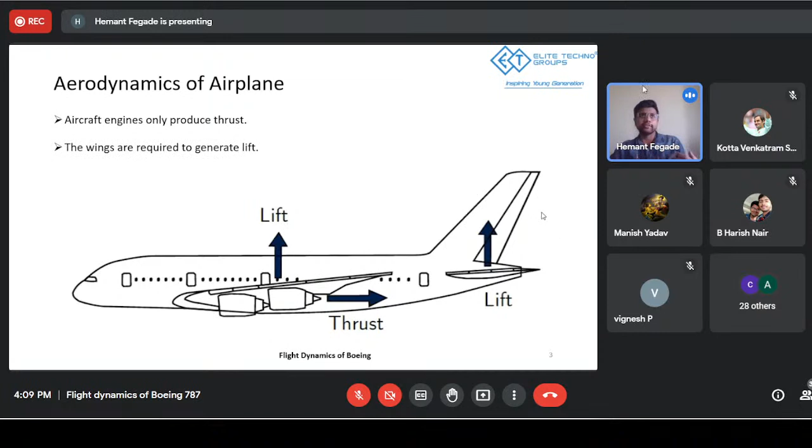When you talk about aerodynamics of an airplane, the first thing that comes into play is that an aircraft has two kinds of motions. In order to fly, it needs to have a certain set of motions in order to get that momentum going, and then it has the biggest influencing parts, like in aircrafts there are the wings, which are the biggest influencing parts that generate lift in the aircraft.

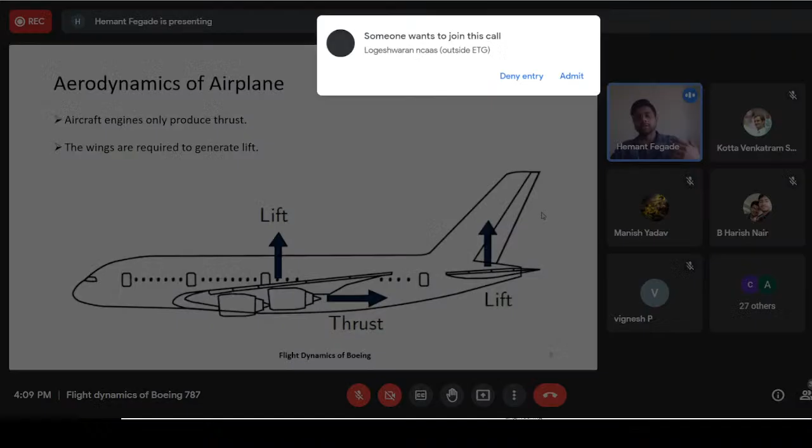Essentially, when you are moving an aircraft, the aircraft engines will provide the thrust that it requires to move forward and achieve a certain speed, and then the wings are adjusted in order to generate the kind of lift in this scenario. Now why, when we talk about this aircraft lift...

There is a phenomenon in those wings - there are small sections that are used, called airfoils. So if you take an aircraft and slice it, and see the side view of it, you will be able to see a shape that is constant throughout the aircraft, but it actually has different sizes. Towards the end of the aircraft the size is smaller, and as you go towards the body of the aircraft the size goes on increasing. Also the orientation of those airfoils is a bit different. So why is it different, why is it like that? We'll see about the aerofoil part first.

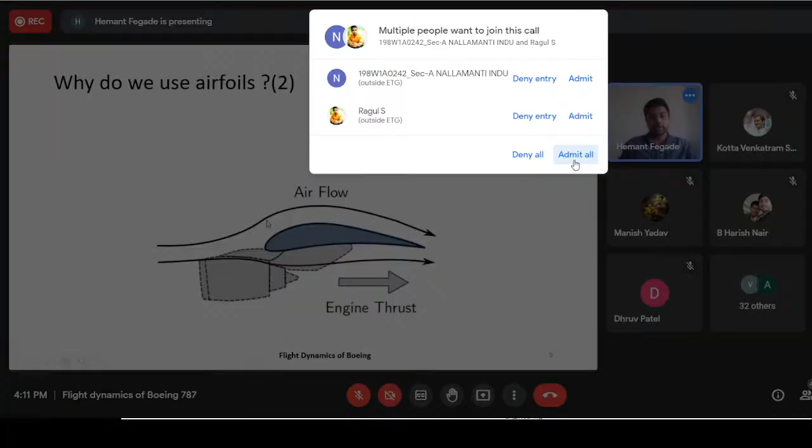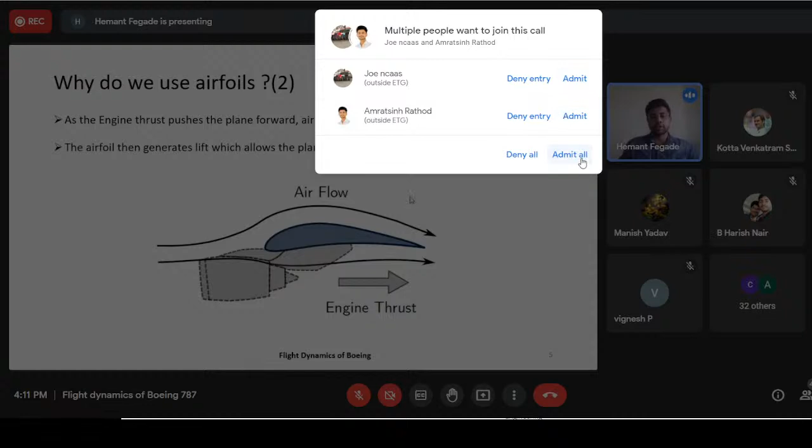Now these aerofoils are used for generating the airflow, generating the lift basically. How they generate lift is air will flow from the bottom of this aerofoil as well as from the top. Essentially this aerofoil generates high pressure at the bottom space. The air that is moving below the aerofoil is moving at a relatively slower speed.

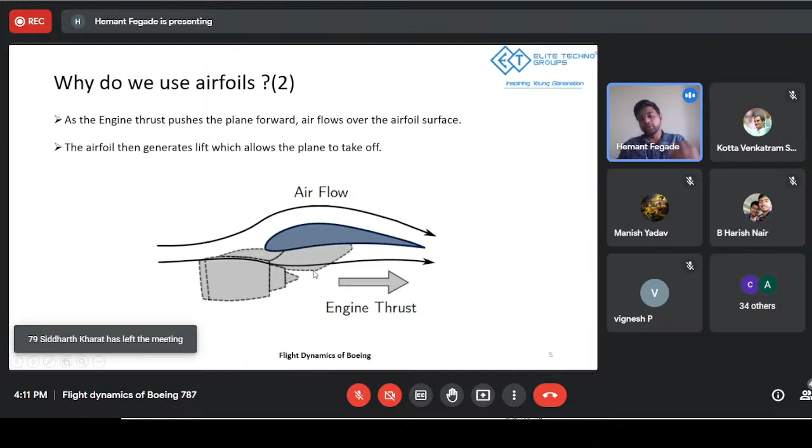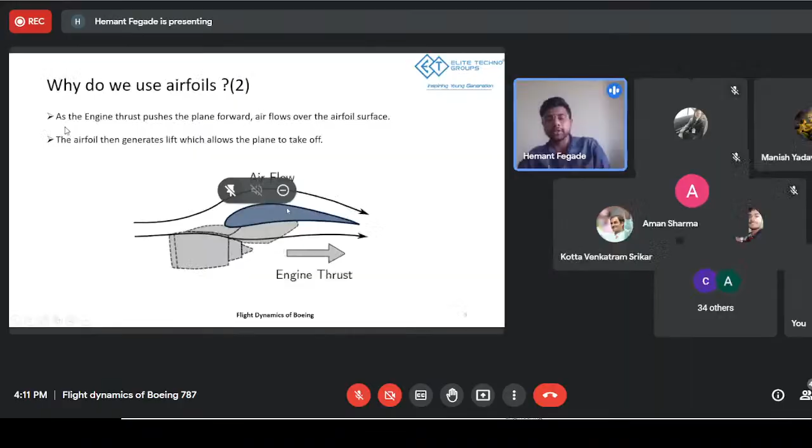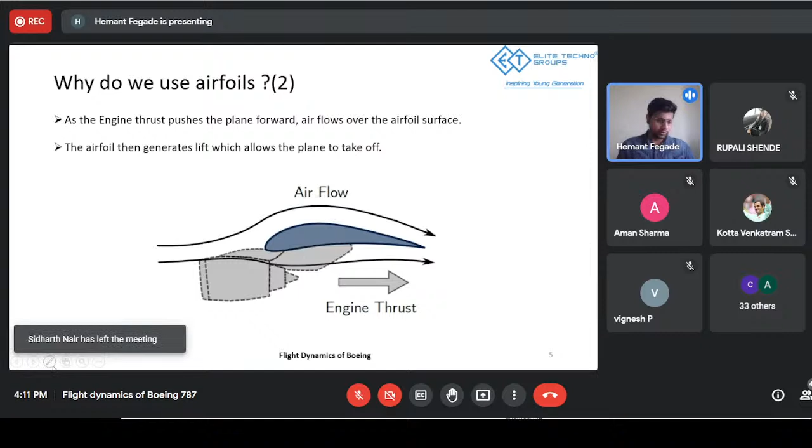At relatively slower speeds, higher pressure is generated. From the top of this aerofoil, the air flows at a higher speed, which generates lower pressure. Due to this difference in pressure, you get an upward force in this direction, and due to that pressure difference, it allows the airplane to take off, right?

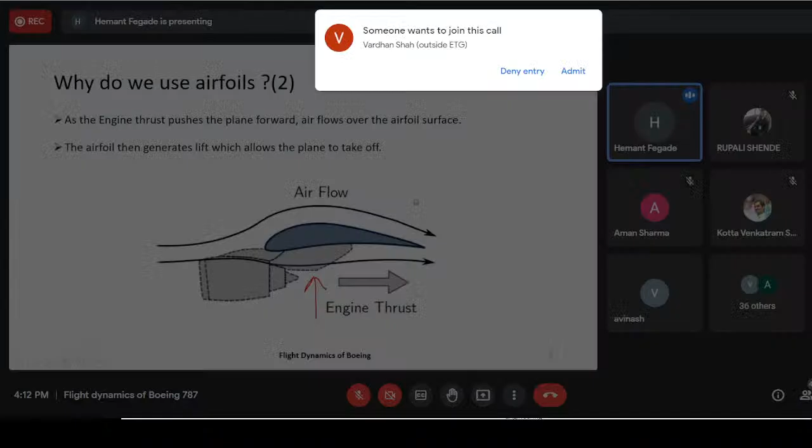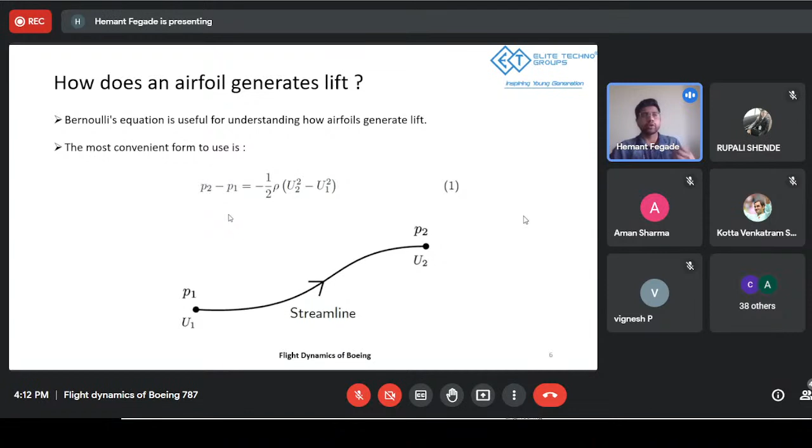So let's see how it generates lift. It uses Bernoulli's equation to generate that higher and lower pressure difference. So when you're moving from a streamline point, you're trading pressure with velocity. When your pressure increases, your velocity reduces. Where your velocity increases, your pressure reduces. That's basically the bottom line of Bernoulli's equation.

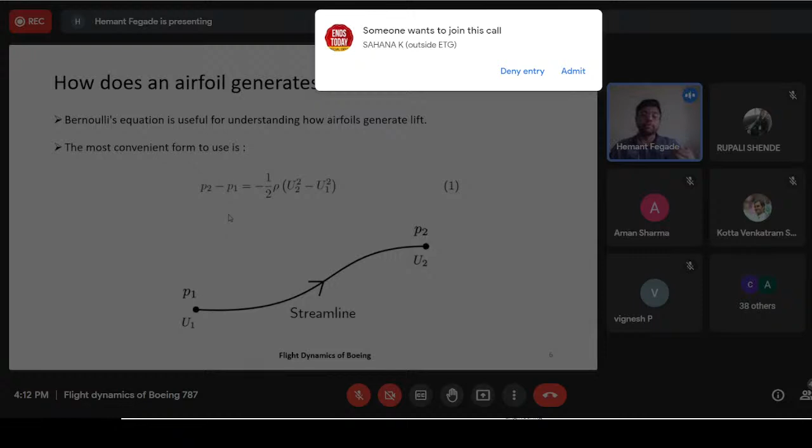And this is the most convenient form of Bernoulli's equation, which is used to identify this phenomena and is being used in the airfoil lift. So how does pressure loading happen?

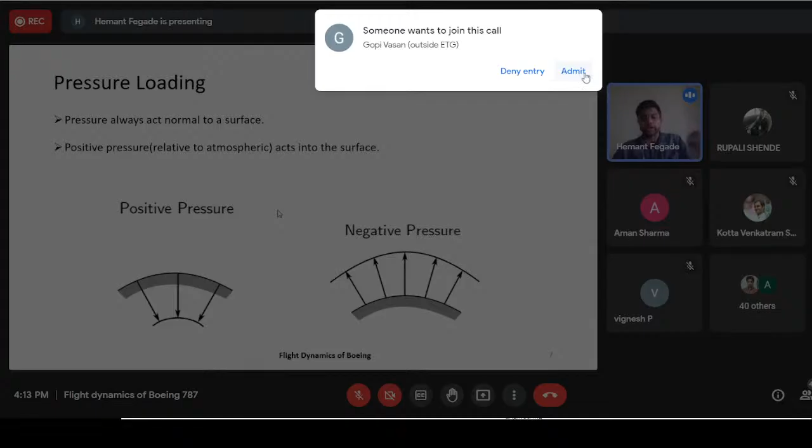When you go into the depths of understanding how the airfoil generates lift, or how the higher pressure regime is generated at the bottom of the airfoil and how it is generated at the top, you need to first understand pressure from its perspective. When you talk about positive pressure, that means you are applying pressure on a certain body - that's the general nomenclature positive pressure is identified for. This is really important for us to understand, because later on when we talk about how the distribution of pressure is done on the airfoil, it matters.

So when a system is in place within a surrounding, if the surrounding exerts some amount of pressure on the system, then that pressure becomes positive pressure, and vice versa applies - if a system is exerting pressure on the surrounding, then it is negative pressure. That's the general context you need to understand from this base point.

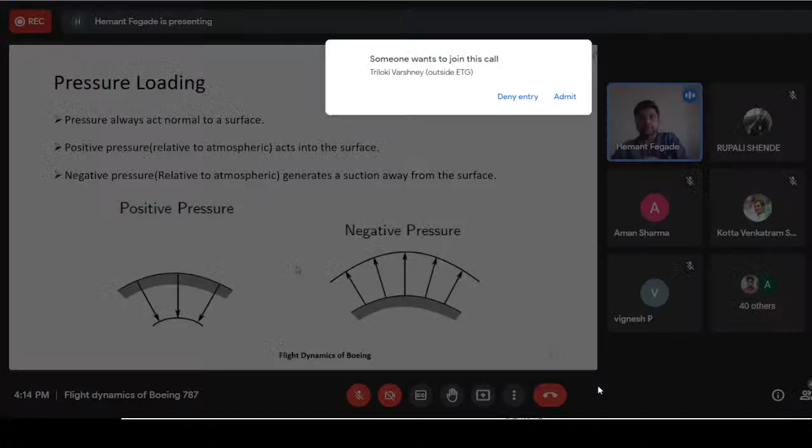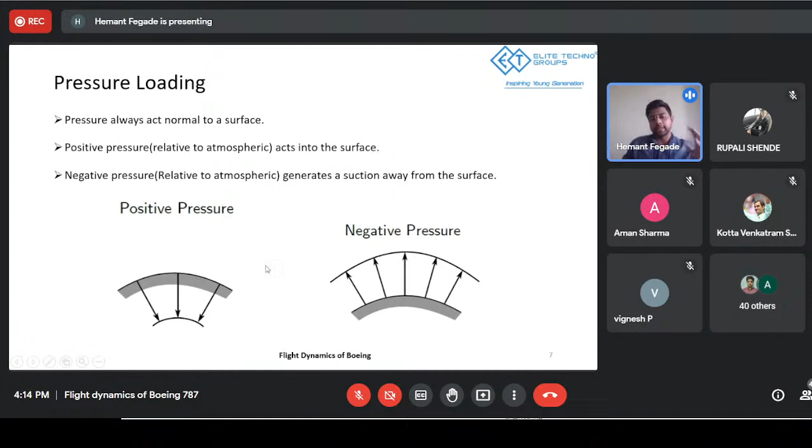Now, when pressure is acting on the system, it is relative to atmospheric pressure, because it acts into the surface. And when you talk about negative pressure, you can think of it as another way where a suction is being generated by the surrounding on the system - there is a negative pressure formed above the surface, and essentially the direction of the pressure becomes from system to surrounding. So that's the context.

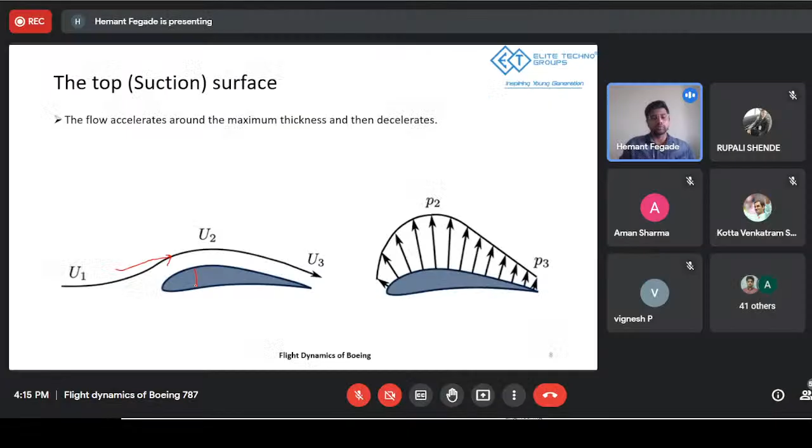Now let's divide the aerofoil into two parts - first we study the top side. When you talk about the top side of the flow over the airfoil, due to the shape of the airfoil, like this nose shape, your flow accelerates around the maximum thickness and then decelerates. So when the air is moving past this airfoil from this point - let me use a highlighter - when the air is trying to move past this thickness of the aerofoil, the flow accelerates and attains velocity.

Now, when you have higher velocity, in turn, as Bernoulli says, your pressure becomes minimum. And as you can see, the pressure is in the upward direction - that basically means there is suction generated. That means this whole area is your lower pressure region. Essentially your system's pressure flow is moving from the system to the surrounding, which opposes the atmospheric pressure - that means your atmospheric pressure is reducing, your overall pressure is reducing in that region.

So that's what happens when the air is trying to move past the top section of the aerofoil, and this is how it is designed intentionally in order to generate the lower pressure at the top side of this airfoil.

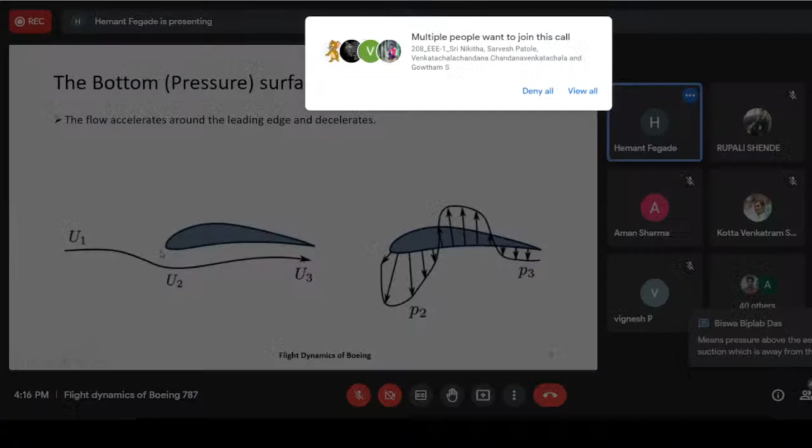Now, when you talk about the bottom area, you will have your velocity moving in this surface, opposed to this shape. Now, the shape is also calibrated in such a way that due to this region, you will have your flow accelerating at this point as well, because it's still like a bend kind of a way where it essentially bends the air that is trying to move past this point, and it kind of gets thrown off.

So basically that's why your pressure here is negative - it's acting from the system to the surrounding.

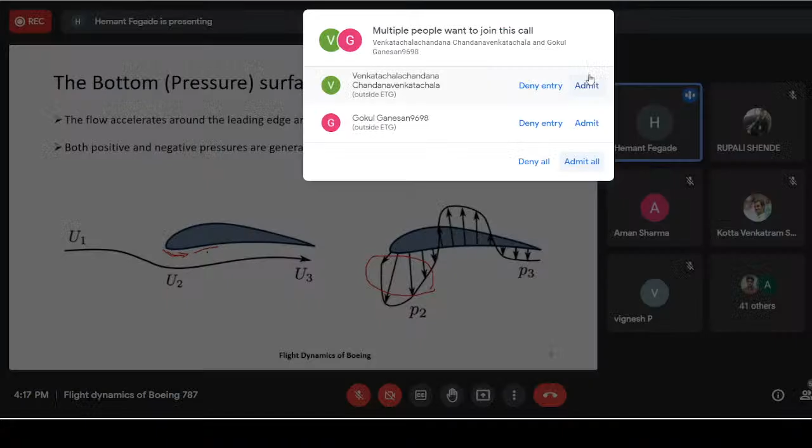When it tries to move past this point, the thickness is reducing. Also the curve is such that the air, the accelerated air, tries to move past this region, in turn generating an uplifting force at this region. This force is applied in the form of pressure, because pressure is nothing but force per area. So this region basically generates the lift in the airfoil, and this lift, when sufficient to counteract the weight of the airplane, essentially tries to lift the airplane off the ground.

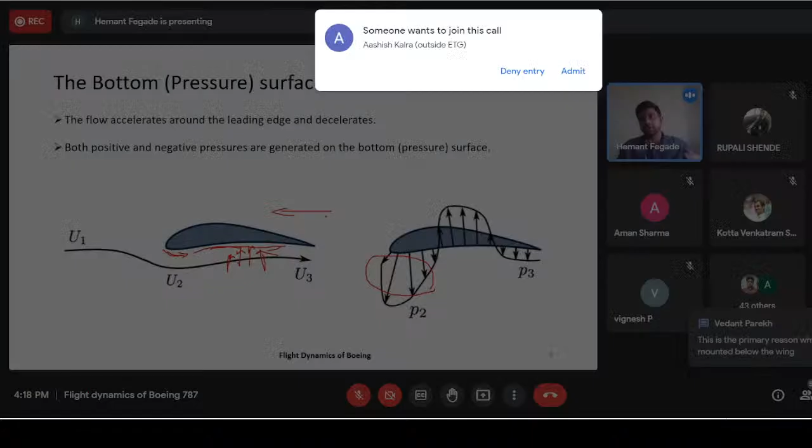That's how the airplane tries to fly. So in order to generate that pressure, in order to generate that momentum, you first need to move in a straight line direction. You need to have the momentum going for your plane in order to have that air moving past this aerofoil at that velocity. Accordingly, that velocity will be converted into kinetic energy, which is generated and then converted into pressure energy, and that's how the lift is being generated. This is how it is calibrated. That's how the general airfoil works.

This phenomena works. So anybody have any questions at this particular point? They can ask me.

Pressure above the airfoil is negative suction, which is away from the surface. Vedant says, sir, 70% of the lift is generated by the upper surface of the wing. This is the primary reason why engines are mounted below the wing.

So, the phenomena here that we are talking about is the lifting phenomena. Don't think of this as a simple aerofoil structure, because there are sections in airplane wings that are like this aerofoil section, basically attached to the airplane. You can see over here, just a minute. You can see over here. So these are the sections.

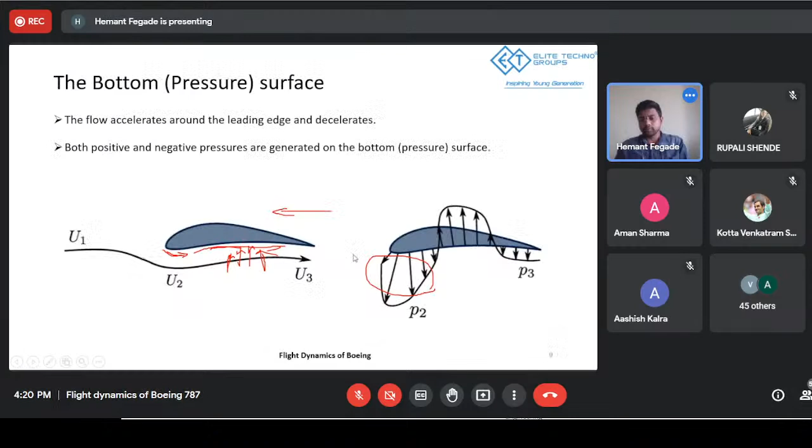Are there any other questions? This next part that I'm going to talk about is going to get a bit complicated. So if anybody has any questions at this particular point, they can ask.

The negative suction created above and below the leading edge is its consequence, the consequence being that it generates drag on the airplane, and you need more fuel, more power in order to counteract that drag by providing more thrust to the airplane. So that's generally how the airfoil structures are optimized in order to widen that positive pressure gap, or positive pressure lift, that we have talked about.

So it actually depends on the shape of what sort of structure you're talking about. It's only airfoils, but there are a few minor changes in airfoil design which are kept in consideration for different pressure requirements. So that's how they are utilized. So yeah, it is the optimum design which is capable of generating higher lift.

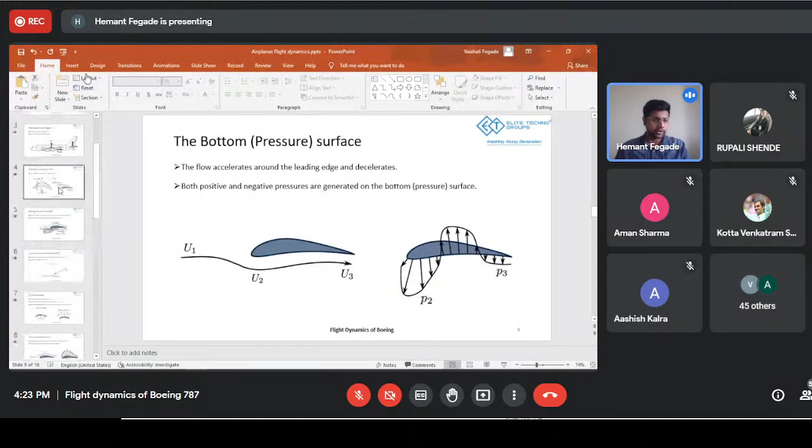Vardhan asks, how does the stagnation point change with change in angle of attack? So basically, there are yawing mechanisms or rolling mechanisms installed where you can actually change the... that's how the sections, that's why the sections of the airfoils are made. So basically, when you talk about these structures, let me just revert back over here. So when you talk about these sections.

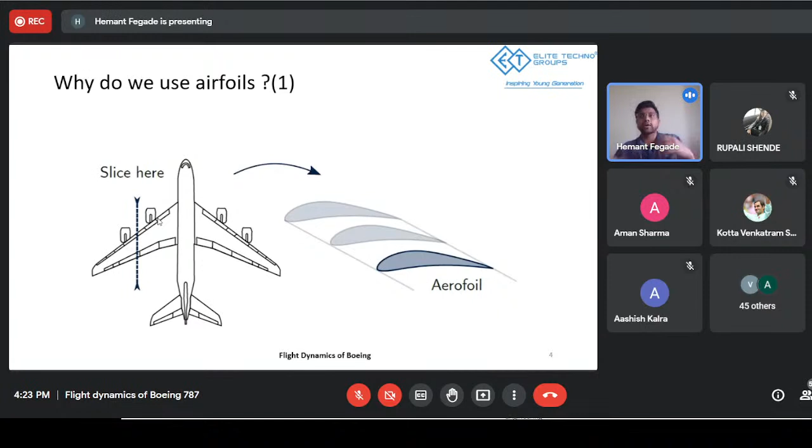This is the purpose why they are basically divided into sections, because as the angle of attack changes, you actually need to calibrate your wings in that direction. Accordingly, your aerofoils will be set, and accordingly they will be able to generate lift. This is how, basically, when you are gliding through, when you are landing on the ground, that's how it is used there as well, where the different configurations are calibrated with the help of computers. They are optimized in order to sense the angle of attack, and accordingly the airfoils will be adjusted, and that's how they actually optimize.

Hemant sir, can I ask you one question? Sure, sure. Boeing 787 intended to replace 767, right? Yeah, exactly, I'm asking.

When we talk about Boeing 767, the actual material and manufacturing, the wing shape, the wing size was a lot more different. When they upgraded it to 787, they actually used composite fibers integrated with plastics, and that's the biggest reason the 787 series has been a big success. I'll be talking more about that as I move forward, but to get through these simple concepts, we need to focus on this part first, and then I'll get back to that.

Yes, so as mentioned, we have to optimize the design of the airfoil to minimize drag and increase the positive pressure below the airfoil. It's not positive suction, it's positive pressure, you can call it a force acting. So if this is an airfoil, you can consider this force I'm applying. It's just increasing this force in order to lift the airplane.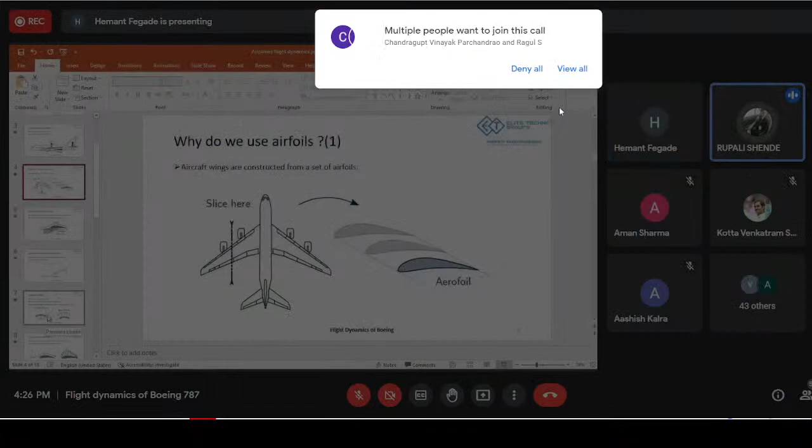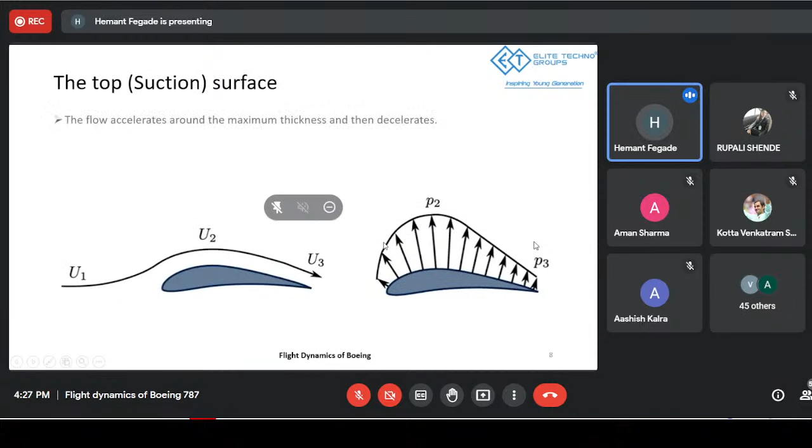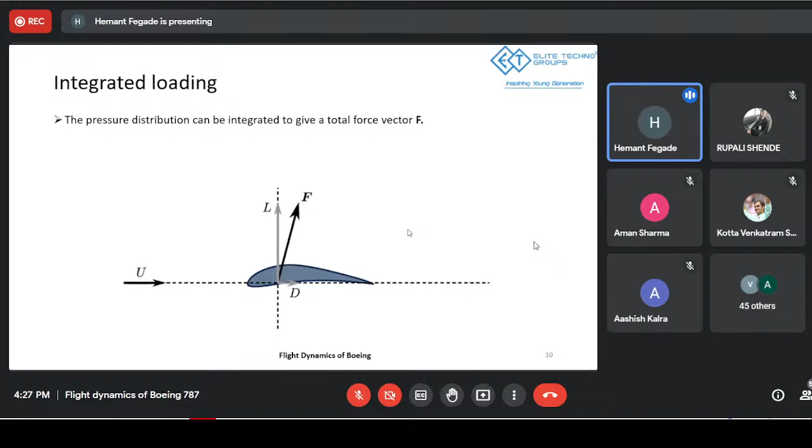Now we have talked about these parts, right? We have seen the pressure loading, the top suction surface, the bottom pressure surface, what kind of pressure behavior is there. Now we'll talk about integrated loading. The pressure distribution is essentially integrated to give a total force vector F. That force vector F should be inclining towards the right side, and it should not be more dominant in drag. It should be more dominant in lift. The reason is we want to lift off the airplane.

So there are two conditions for this: one while you are departing the airplane, and one while you are trying to land the airplane. At the start of the journey, when you are trying to fly it, the most dominant force will be lift. And when you're trying to land it, you need a proper balance of lift and drag force in order to get it safely landed without introducing stall.

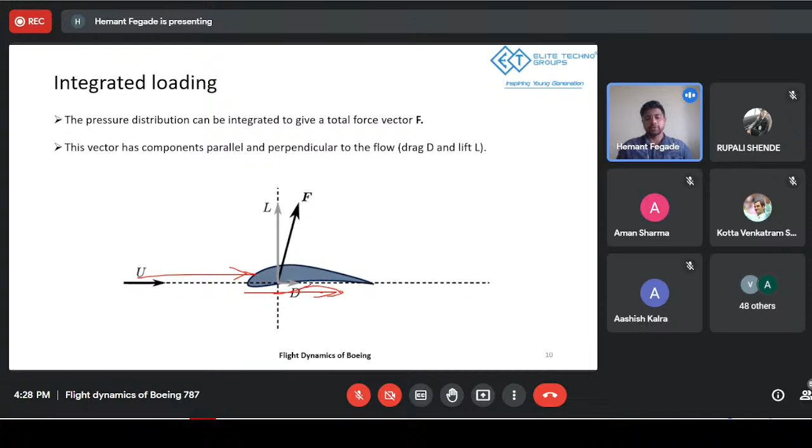When you talk about this force balance, your velocity component, the velocity directly incident on this airfoil, is divided into two components as I said. Your horizontal force exerted by the air on the airfoil is going to generate drag, and whatever air moves past here moves in this direction, generating lift. So this is how the force balance looks like for the plane.

So the wing needs to generate as much lift as to exceed the weight of the entire plane. It also needs to exceed the minimal drag that the plane is experiencing along with its weight, and that's how it counteracts the overall lift. So basically, you have your lift force to counteract the weight, and thrust provided by the jet engines to counter the drag. That's how both forces are counteracted, and that's the general idea of the airplane lifting. This is the force balance diagram for that.

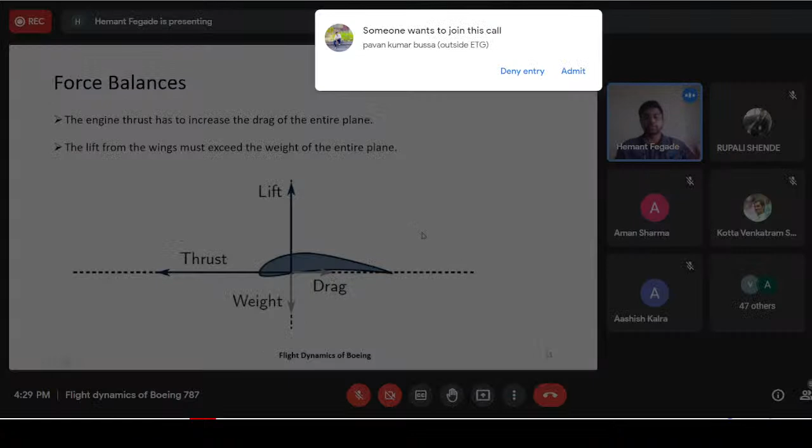Now we talk about angle of attack. Basically, when you're trying to pitch, before we move on to this, I just want to ask: what should I do in order to generate more lift force below this airfoil? What are the things that I can do? If anybody can answer that.

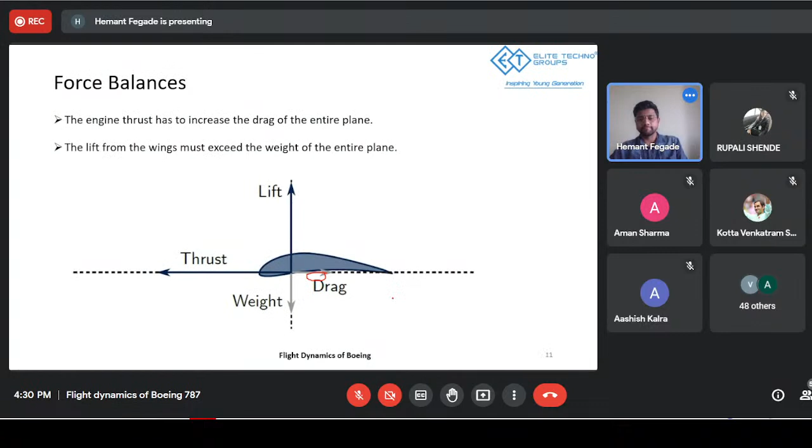Deep Chawan says increase area of airfoil. Can you elaborate on that, Deep?

Just tell me, how can we increase the area of airfoil, and basically how is it going to affect things?

Manish says we can increase the speed. Okay, so if I increase the speed, that means I can generate more lift force. Is that what you're saying? Okay.

What is the most basic thing that I could do in order to counteract the different angle of attacks and still maintain or generate a higher amount of lift?

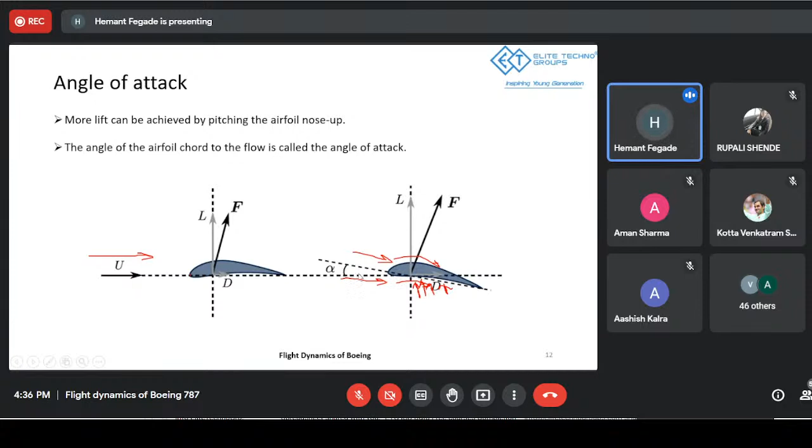Now, what will happen if I increase the angle of attack too much? Because you must have a doubt, like why don't we then increase the angle of attack as much as possible, and still the airplane will try to move upwards, right?

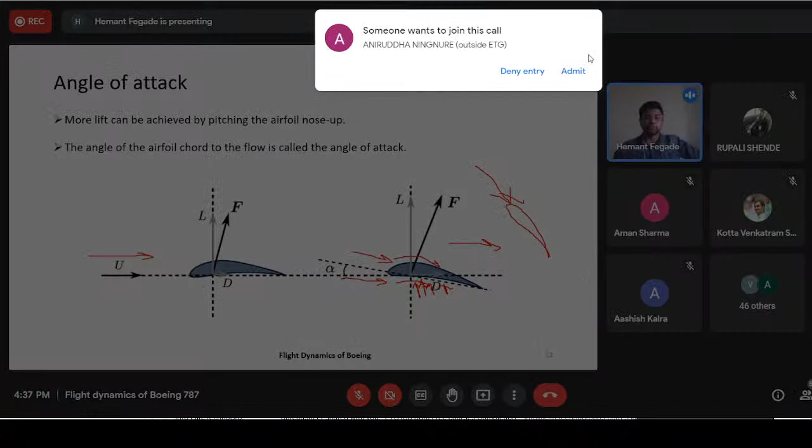So, can anybody tell me what will happen if I put my aerofoil in this manner? So this is my horizontal air, right? And this is my nose, like the perpendicular. I'm sorry about my drawing skills, but yeah, this is the nose direction, right? The alignment, nose alignment, and this is going to be my alpha angle, right? Angle of attack. So what if I do this? What will happen? Can anybody tell me?

Because essentially, if my theory is like, if I try to increase the angle of attack, that means a lot of air is going to move below the airfoil, right? And that basically generates higher lift. So this is going to generate a lot of lift, right?

So what could be the effect if I increase my alpha angle to this much? Can anybody tell me?

Advait says, sir, at higher angle, the airfoil will stall and lift will decrease. Okay. Can anybody unmute themselves and tell me? Hello. Yes, Pratham, yeah. So it will increase the amount of stall. Okay, and could cause a huge amount of drag also. Okay, can you explain it to me or everyone here, like how it does that?

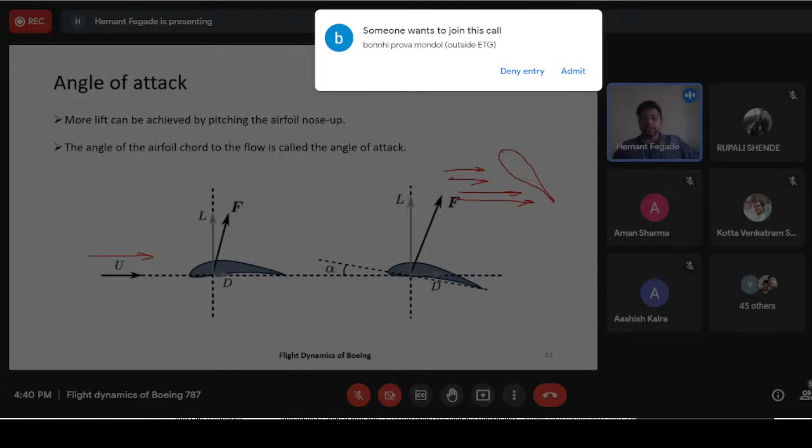So when I have my airfoil at this angle, okay, basically due to this position, as you can see, the horizontal air incident on this shape will increase the drag in the horizontal direction. Basically your force F vector will be more dominant towards drag. In this particular case, if this is your drag, then your force vector will be more dominant in that direction. So this is your F, and this is the drag force.

So when your force vector F is more dominant with the drag, basically your airfoil starts stalling because there is not enough air going from the upward side to maintain that lower pressure regime that we had initially talked about. Most of the air is trying to move below the airfoil. That basically tries to increase the drag, and that's how your aircraft fails. So basically, that's how the lift fails.

So this is the biggest consequence of increasing the angle of attack too much, and that's why we need to have an optimum angle of attack for providing smooth operation and generating the optimum lift required for an airplane to lift. So these are a few of the elements that are being used to stabilize the airflow or stabilize the aircraft flow while it is in the air.

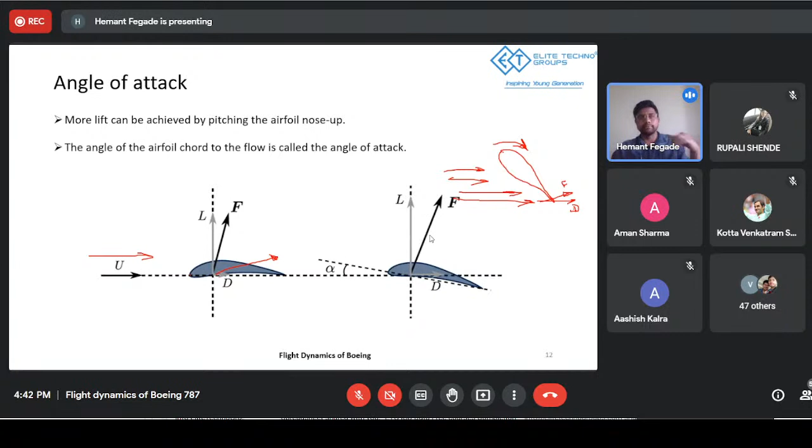Now, this is the effect of what we have just talked about. So basically when your angle of attack becomes too large, the airfoil starts to stall, and that increase of drag, that decrease of airflow on the upper side of the airfoil, basically classifies as stall. When your drag increases, your stall also increases with the increase of alpha angle.

So when you try to draw a graph with angle of attack and the lift force that is generated or required, you can increase the angle of attack up to a certain point where you will get maximum lift for that optimum angle of attack. Beyond that angle, that's your critical angle of attack, and beyond that, your airfoil will start to stall. So it actually depends on what sort of mechanism, what sort of flow regime you are trying to implement.

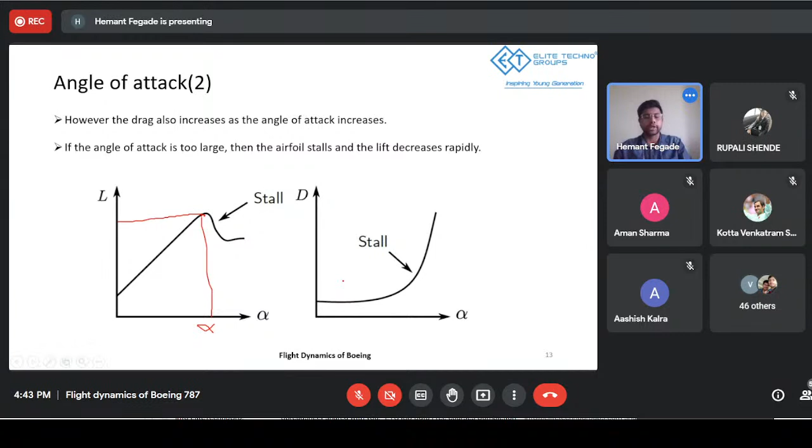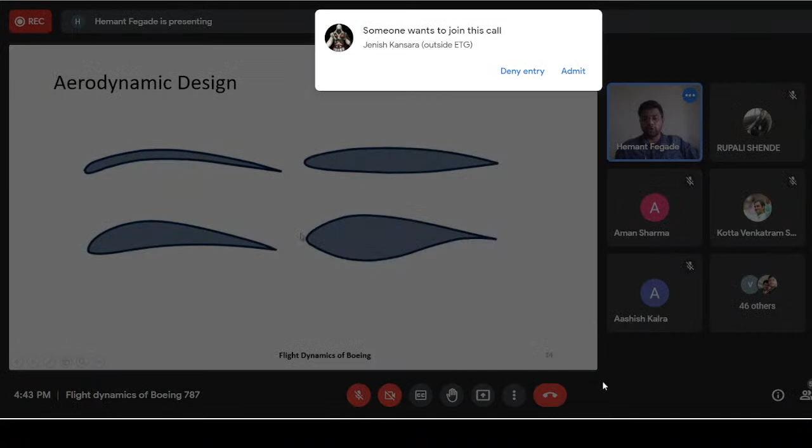Now, based on this ideology and the basic understanding of aerodynamic design, there are a few shapes of airfoil used for different concepts. I won't go into depth on three of these shapes because I need to talk more about this last shape, and this brings me to the point of connecting this to the Boeing 787 aircraft and why it is more efficient.

When you talk about this airfoil design, it's basically optimized to extend critical Mach number operations. Now, when you talk about aircraft flight, your flow needs to be in the subsonic region all the time.

If your airflow becomes supersonic, it will generate a huge shock wave. That shock wave generates drag, and heavy turbulence will be generated. You'll feel heavy turbulence throughout the aircraft, and that might increase complications. It might actually cause a crash.

So why does that happen? When we talk about airflow moving past this airfoil structure, taking this airfoil as an example, even if your aircraft is moving at a reasonable velocity, well below the supersonic regime.

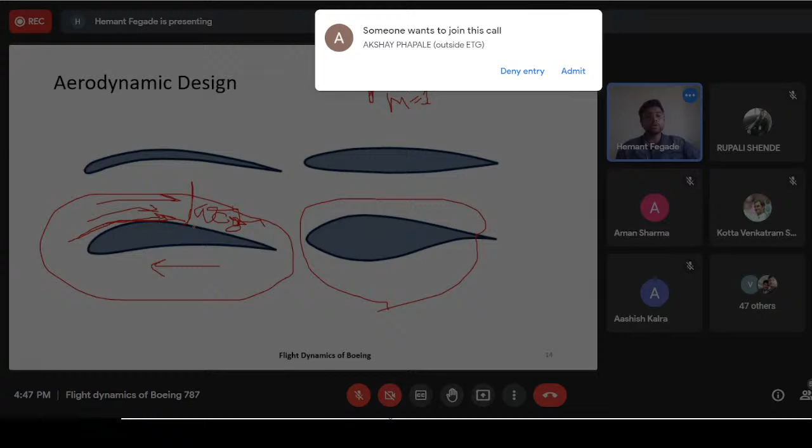Now, in order to counteract this, the updated design is basically this -- this airfoil is also called a supercritical airfoil. There are a few minor changes in the design, so it's not exactly like this; the one NASA developed is something like this.

This shape is essentially called a critical Mach, or you can even call it a supercritical airfoil shape, which is basically used to calibrate or avoid these kinds of instances.

What this shape does is, with the top of the airfoil being flat, it tries to keep the airflow in check so it does not accelerate too much. And to counteract the lift portion, due to the sharp change at the bottom, you get negative suction there. But due to this sharp change, when air tries to move past this region, it will in turn generate more lift -- the amount of lift required to lift the aircraft.

This shape is critically optimized so that the Mach number never exceeds 1, or it basically remains in a subsonic flow. And even if it goes into the transonic state, the shock wave size -- which was previously very big due to extensive acceleration -- becomes reduced. Because of the flat surface, there isn't much acceleration happening, and even that reduced turbulence is manageable, allowing you to stabilize the aircraft. Now this exact concept is being utilized.

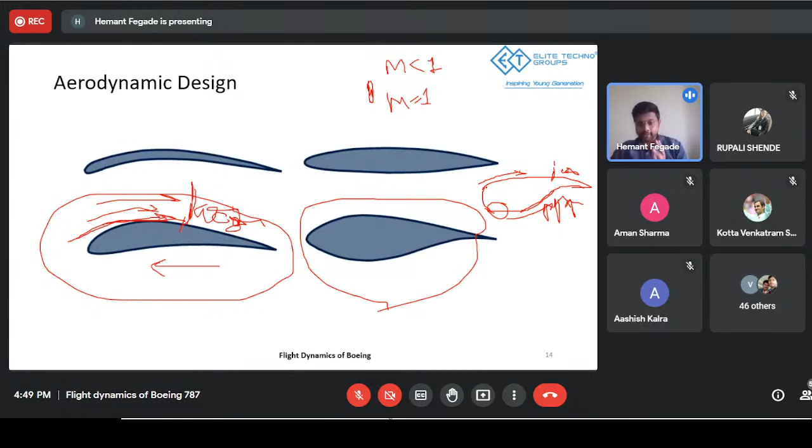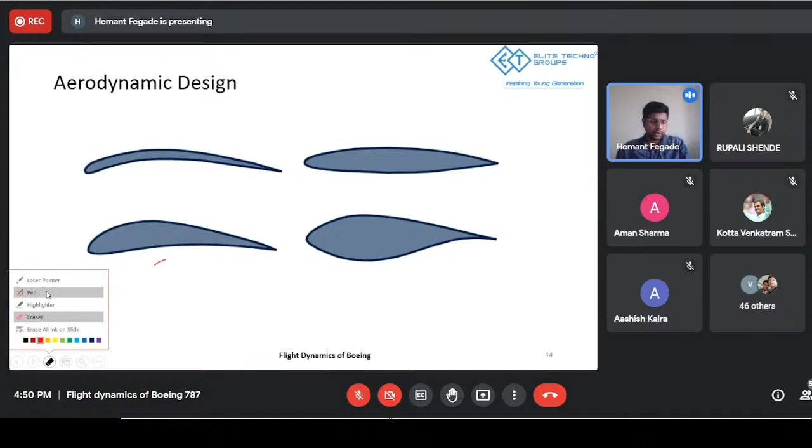In the latest Boeing 787, the supercritical airfoil has geometric features such as a flat upper surface, round leading edge, and high camber at the bottom right of the airfoil.

It is used to increase the drag divergence Mach number, and also to decrease the wave drag. Exactly, Vedant. So these are a few advanced concepts you might come across. I'll be talking more about shock waves and related things in the next session, which is a continuation of this part where I'll talk about supersonic flow. I'll try to cover as much as possible in that regard. But till this point, if anybody has any questions or doubts, they can ask me.

It did two things mainly: it reduces the weight, due to which counteracting the lift part is much easier, and it flew faster. While designing the wings, the wing of the Boeing aircraft has a rib cage kind of structure.

When you try to lift it, the whole wing itself tries to bend. Previously, when this kind of bending was tried to be integrated into the aircraft to facilitate smooth or more lifting at the start of the flight, it was very challenging, because in order to bend the whole wing, it required a tremendous amount of force.

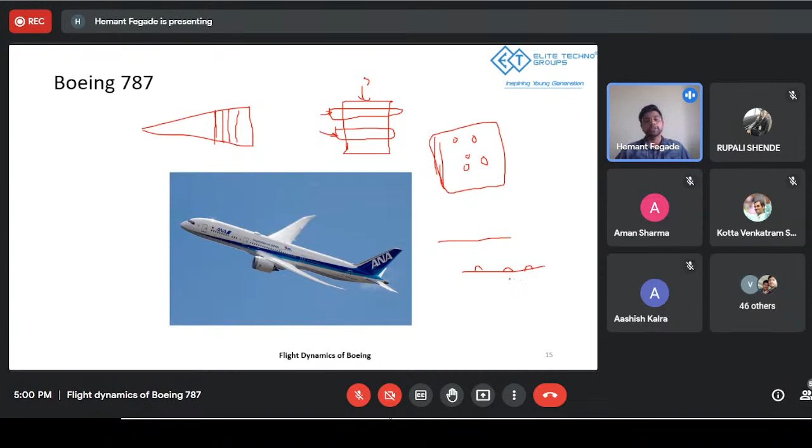Yeah, so this is one of the key advantages. But according to the thrust that is provided to the aircraft, all of these things are counted step by step, and that's how this Boeing 787 aircraft emerged. This is the biggest advantage the Boeing 787 has, and that's how it essentially has the longer flight duration.

It has longer wings, and due to this longer shape, the size of the wing is basically longer because the weight is calibrated. Weight is reduced due to less heavy material being used, so they have actually increased the size or length of the wings.

Now due to that, if you consider this wing, the longer your wing is, the fewer vortices are formed towards the trailing edge of your wing. Due to the length of the airfoil, the air flowing below the wing, we have essentially increased the area of the wing, and that's why we have minimized the vortex towards the trailing edge that is being formed, which also introduces a form of drag in the flight mechanism.

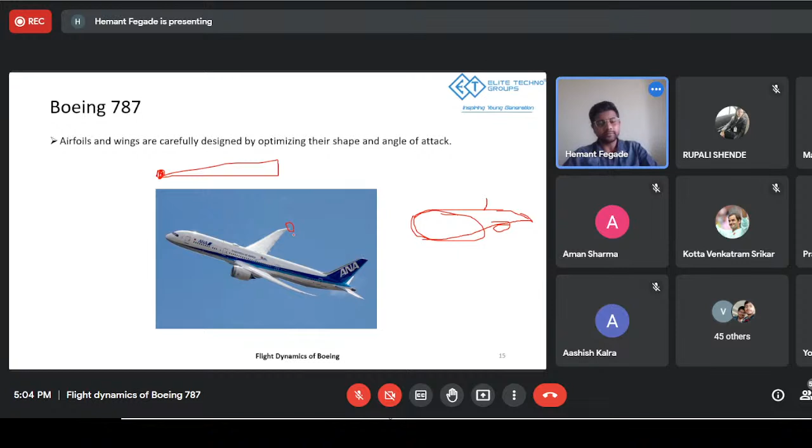So these are some of the key advancements or features that Boeing 787 has, and that's how the Dreamliner comes into play, where it's the biggest, cutting-edge aeronautical advancement still there. So that's the general idea about the Boeing 787 and everything we have discussed. Now if anybody has any questions regarding Boeing 787 or anything we've discussed, they can ask me.

Yes, Rupali, do you have any more questions? Only about Dreamliner, sir. Okay, yeah, you can ask me, no? So if there are any specific questions from you, I can try to answer them.

Okay sir, can you explain raked wingtip? Can we explain raked wingtip of the 787? Actually, I'm not getting the question, I think there is some issue. Can you please repeat? Oh, so this is a specialization in the Dreamliner, Boeing 787 - raked wingtip. R-A-K-E-D wingtip, W-I-N-G-T-I-P. Still, I'm not able to understand, can you just put the question in the chat box so that I can understand? Sir, wings are swept in an upward direction. Yeah, exact, wingtip, yeah.